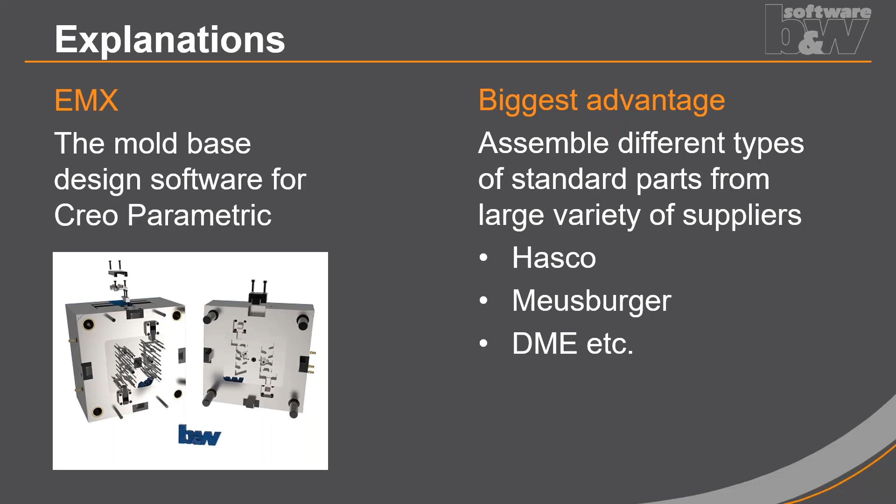What kind of parts can be assembled with EMX? Of course, for Moldbase design, you need the Moldbase plates. And there are other types available like screws, standard screws, shoulder screws, but also for the ejection of the mold part, you need ejector pins, you need guide components, or even cooling components for the cooling circuits.

It's great that you have these standard parts available, but on the other side, it's also necessary that you can create standardized cutouts within the interfered plates or other components. On the right-hand side, you see this guide component, and this guide component interferes with 3 Moldbase plates. And of course, you need different bores inside these plates to assemble the guide component. And that is also a big advantage of EMX, that you can automatically create these standardized cutouts for any type of standard part components.

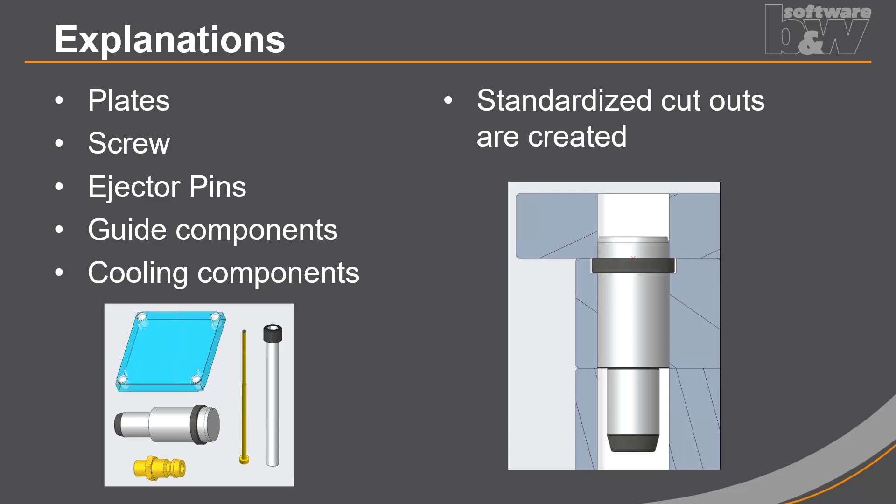Okay, so what has changed in our latest EMX version to make it ready for color coding? So far, we only created the cutouts, so only the geometry of the cutouts. And what we now introduced is a new parameter, which is called EMX_surface_function. And this parameter can have different standardized values. This parameter is added to each surface inside a cutout, and every surface will have a standardized value which describes the function of this surface.

So yeah, this is a little theoretical. So let me just explain this in a tiny example that everyone will understand. I have prepared a tiny example with a screw. So even if you're not a mold maker, you will understand this example. Here you see two plates that are fixtured with a standard screw, and the screw also has created several cutouts inside these plates.

And here you see highlighted in green color the surface of the counterbore. And on the right side, there is also the standard parameter dialog visible. And I have selected here the surface. And at this surface, you will find this newly introduced parameter called EMX surface function. And the value of this parameter is cylinder_counterbore. It's in German, but I think you will know this dialog quite well.

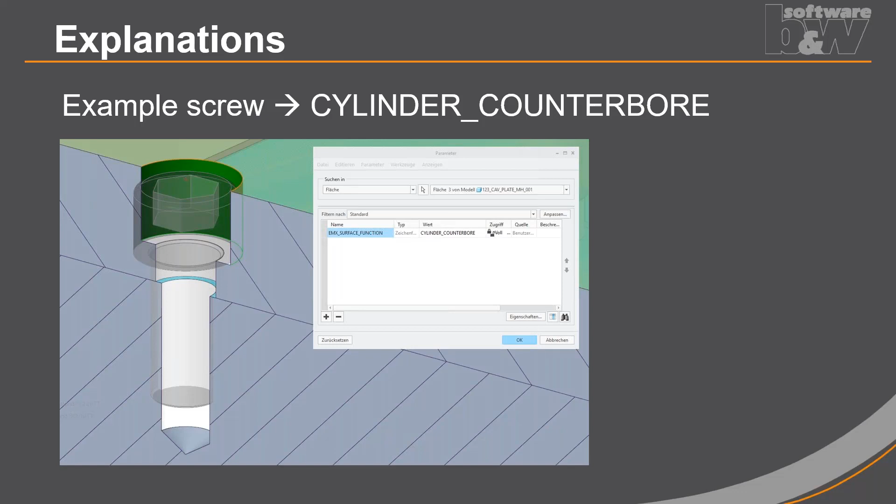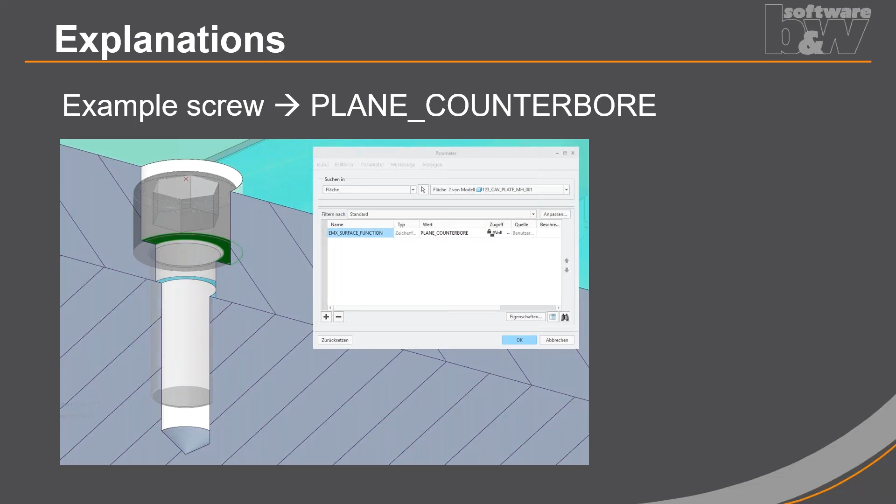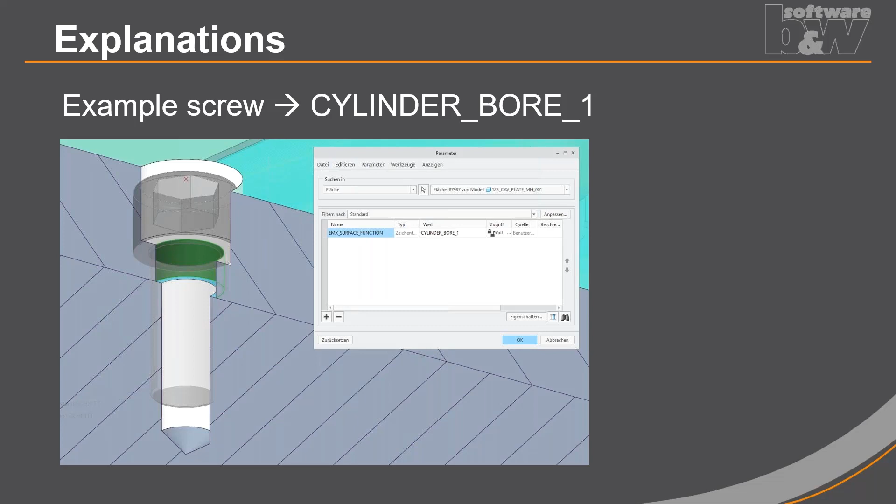I will switch to the second surface here, highlighted in the green color. And here we have another value for this surface function, and it's called plane counterbore. So it's the bottom surface of the counterbore. The third surface that we have in this example is the through hole of this screw. And this value here is called cylinder_bore_1. So this just tells EMX that this is just a through hole, not a specific functionality.

Okay, and the last surface that we have is the core hole of the thread. So this value here is cylinder thread core hole.

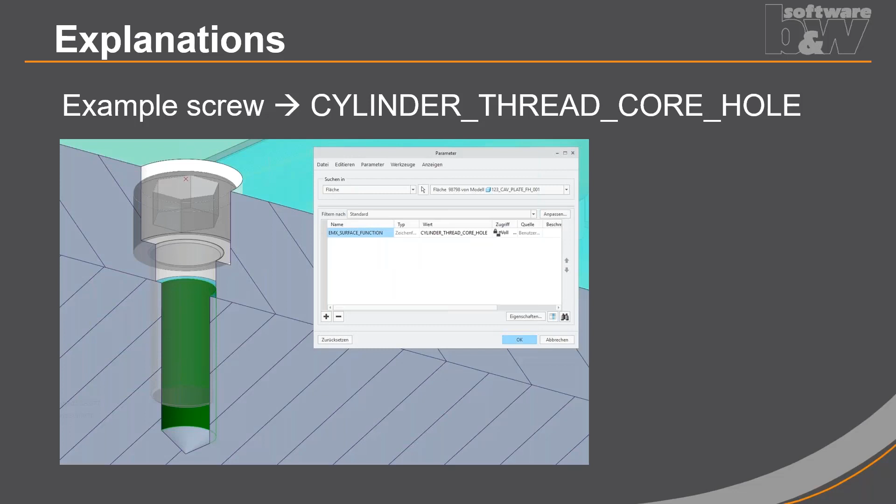Okay, so this was just the example for a screw, but of course there are many other functions of surface that can come up in several cutouts that are created with EMX. And if you are interested in these surface functions, we have created a blog post on our homepage. And this blog post explains all the different values that we just introduced to make it ready for SMARTColor.

I will just switch to this blog post. You can find it here. It's called designated surface function for cutouts. The link is also included in the presentation, so you will find this blog post quite easily when we send you the presentation. And here is a tiny explanation in the beginning, and then you will have just images with the usual EMX cutouts that are created, and with some colors and with the designated values, you can just see what values the surfaces have.

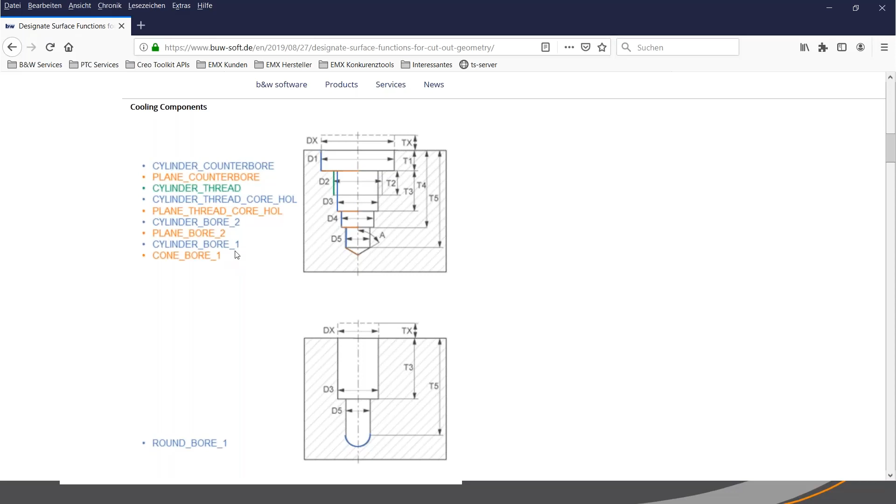Okay, so you have this here for cooling components, for O-rings, and all other components that can show up. So here we have ejector pins, and on the bottom you will also find the values for guide components and so on. Okay. So let's go back to my presentation.

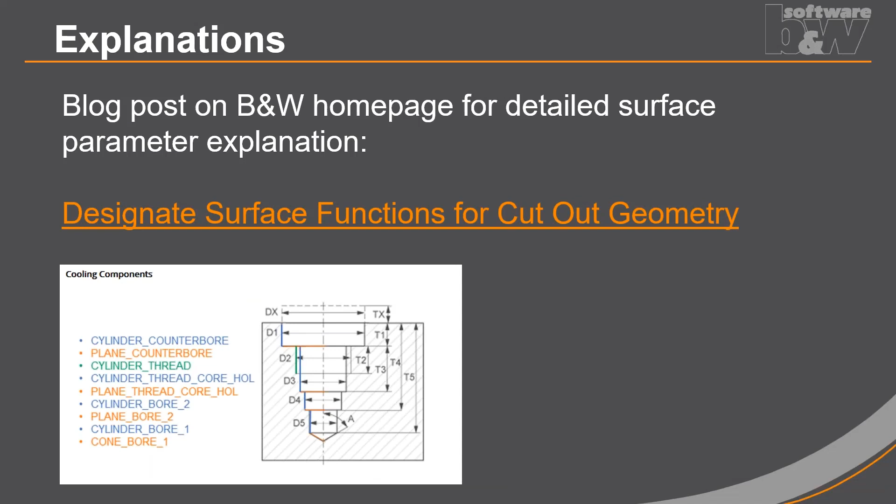And now the second question that arises is, how can we now convert these parameter values into colors? And as the topic of this webinar already explains, we will use SMARTColor here. So SMARTColor is our tool to designate values to surfaces, and to make this possible, we just introduced a special or customized SMARTColor configuration for EMX. And you can download this configuration from our website if you are interested in this configuration, if you want to test it.

And what do we do? We now assign RGB colors based on the parameter values that we just created during the design of the Moldbase. And we used the color coding rules of the VDWF. So this is a quite known association of German mold makers. So these guys sat together and they came up with a standardized color coding rule set. And we just decided that this makes sense as an example because it's a standard which is not just for one company. It's for mostly mold makers, but maybe it's also relevant in other parts of the world as well.

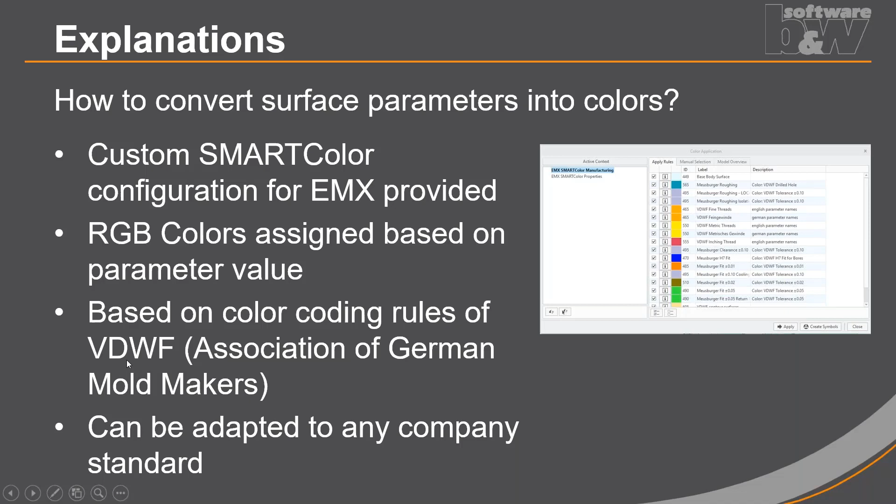Okay, so if you apply now the colors with SMARTColor, here for our screw example, you see that there are two different colors assigned in this example. And this green color basically says this is a Meusburger roughing standard. So this means this VDWF standard is also used by the Austrian supplier Meusburger. So if you send out the colorized parts to Meusburger, they will ship you the part machined based on these standards.

Okay, so green color means Meusburger roughing, so it's a VDWF drilled hole. And the second color, the yellow color, means that it's a metric thread, so it's a standardized thread based on the diameter of the core hole. So that's what it says. Okay.

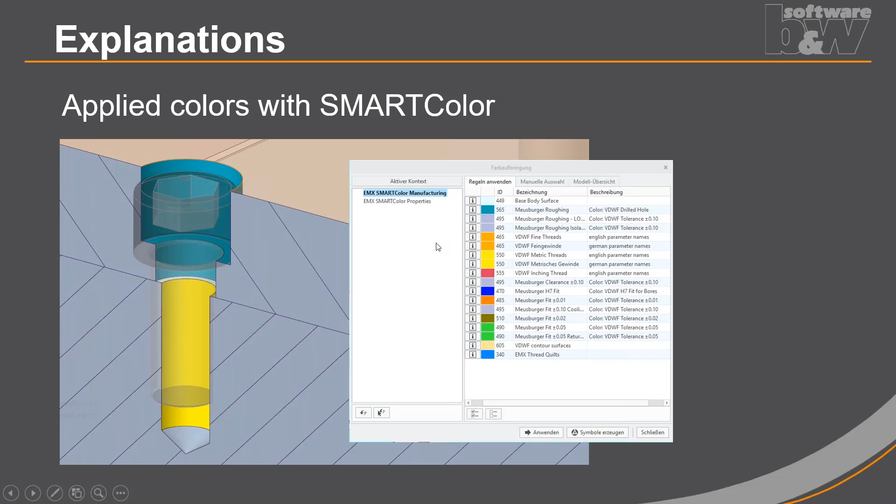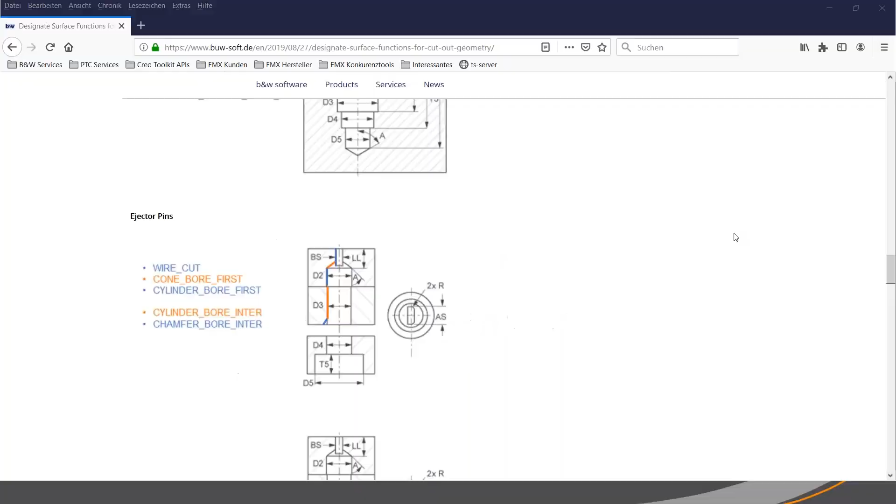Okay, so then I will just start with my Creo live demonstration. So I have basically 2 points that I would like to show. I would like to show you how you can apply color coding rules based on a configuration. And the second point will be, in case surfaces are not covered by this color coding rule set, you can also apply colors manually to finish the part. Okay, so then I will just switch to Creo Parametric. No, this was not Creo Parametric. Okay, so here we are.

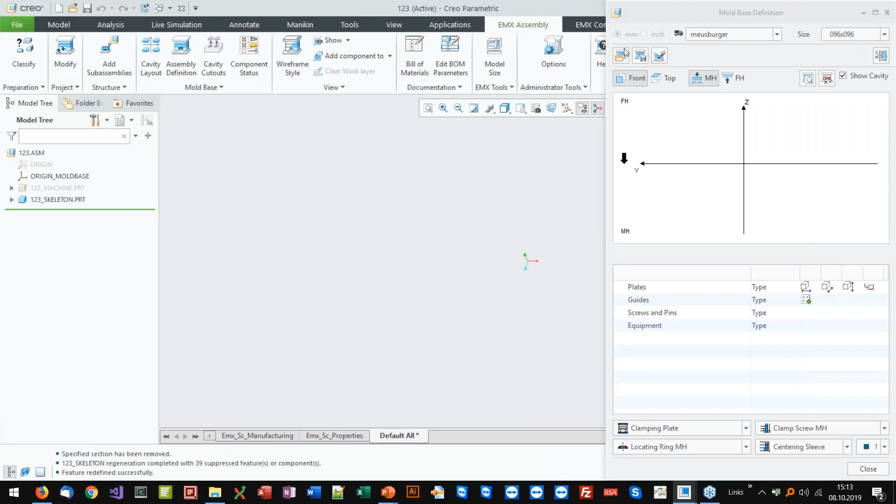Okay, so I will create a new project to show you how this works if you really start a project from scratch. So I will switch to the EMX tab and say create new project. And basically it's not important what the project name is, so we just use the default values. And now we have an empty new Moldbase assembly. And to speed up the assembly definition process, I will just use here this recipe type 1 from Meusburger, which basically contains a Moldbase stack with a couple of plates and a couple of guide components and clamping screws.

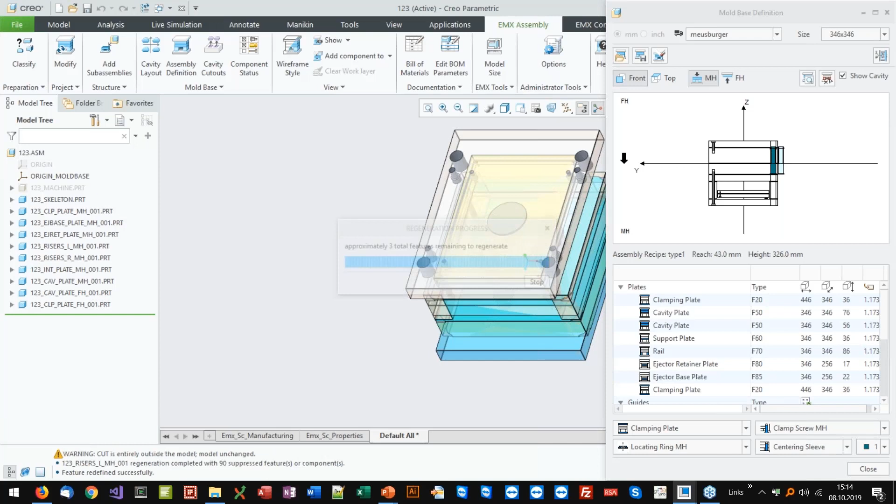So all plates are assembled, the dimensions are set to the correct values, and just some default colors for the plates are set up. And now we are done. Okay, so this is my default empty mold base with just a couple of plates.

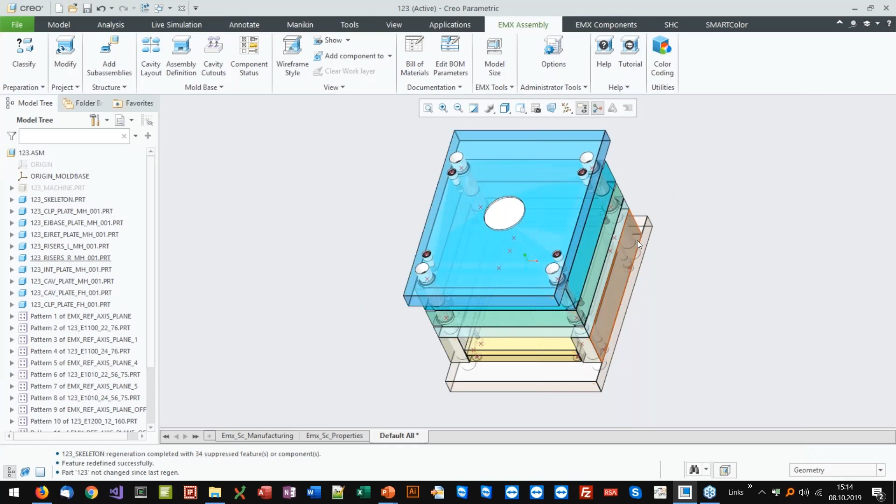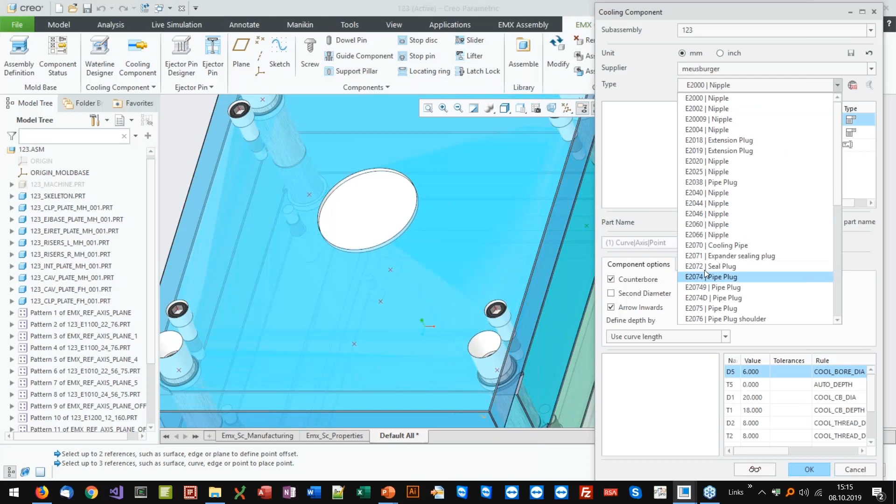And to explain how these rules work, I will assemble a cooling component because it's quite easy to explain the rules with this example. So let me just create a new point. And then choose EMX component, cooling components. And now I will select the E2072 seal plug. I have to select another size with the diameter 12, and I'll select my references, point

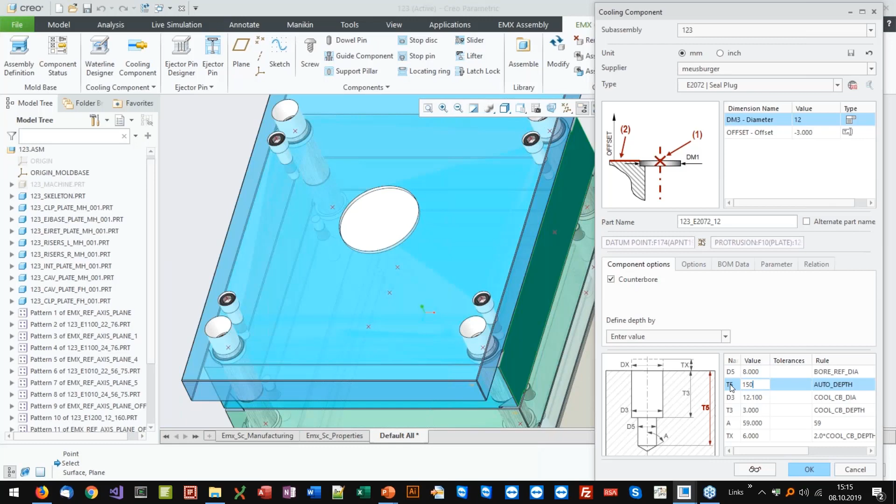and surface. Now we have to tell EMX how deep the drilled hole should be. And then we can assemble the component. Okay, quite fast. Okay, so now here we have the seal plug. We created a hole, and now we'll have a look at this component. So I will open the plate.

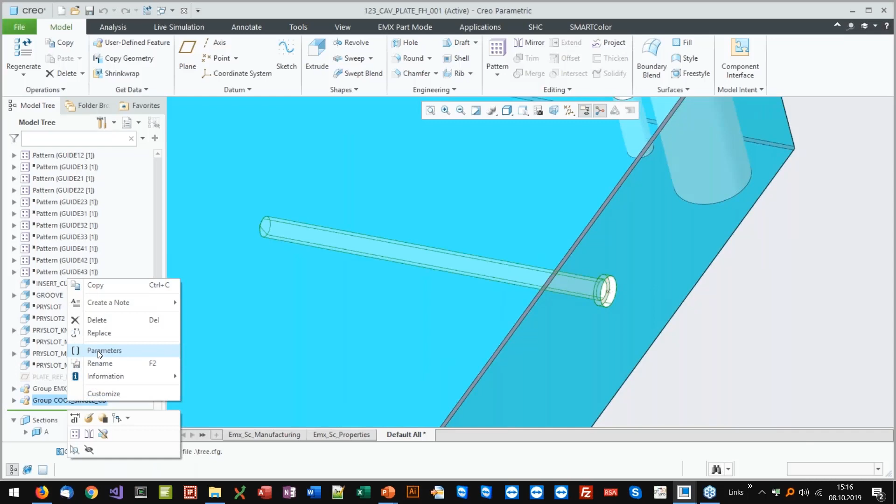The plate already has a couple of features predefined, so the guide holes, and here we see in the model tree a UDF was created called cool single counterbore, and this is related to my Meusburger component. So if I have a look at the parameters which are written to this UDF group, you will find several values which tell me the source of this cutout. So here this BUW component value is E2072, the supplier Meusburger, and the type is cooling.

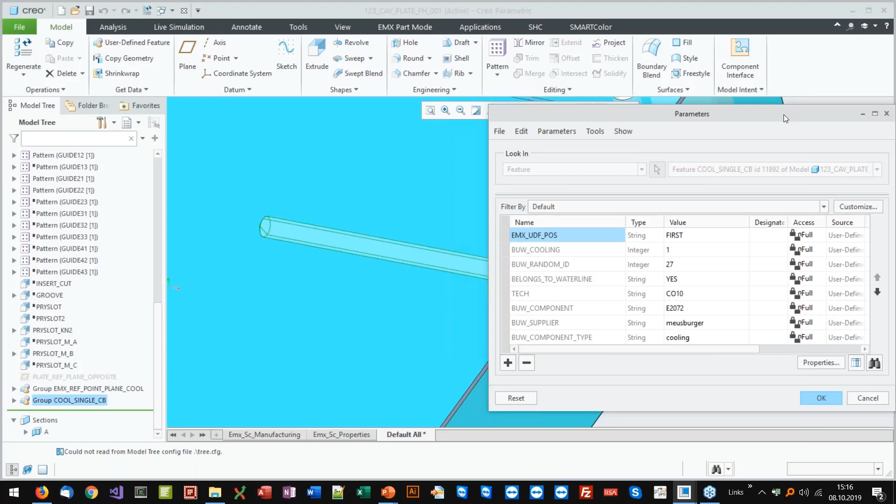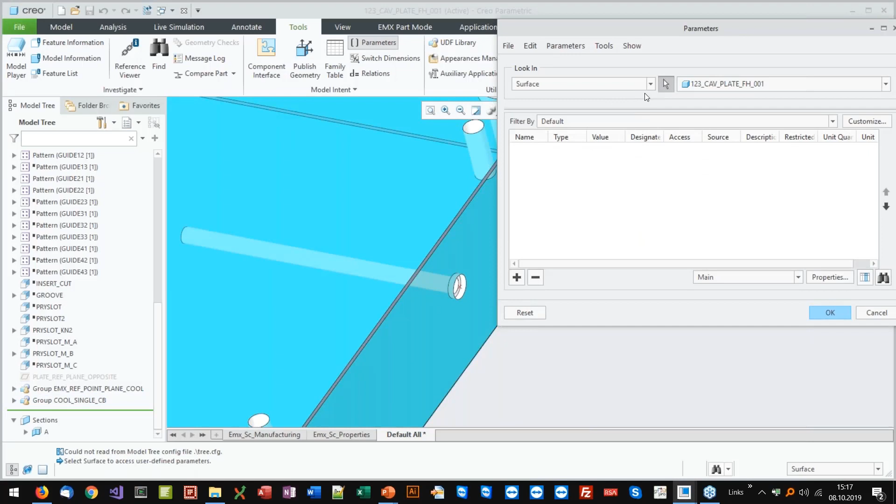Okay, so this will be relevant for our rules later on when I explain this a little bit more in detail. If I go to the parameters dialog, move this a little bit to the side, I can now choose here from surface. So I can select a surface and see what parameters are assigned to this surface. If I choose this counterbore surface here, I have to rename it, otherwise I cannot see the parameters. I see now the parameter EMX surface function, and the value is cylinder counterbore.

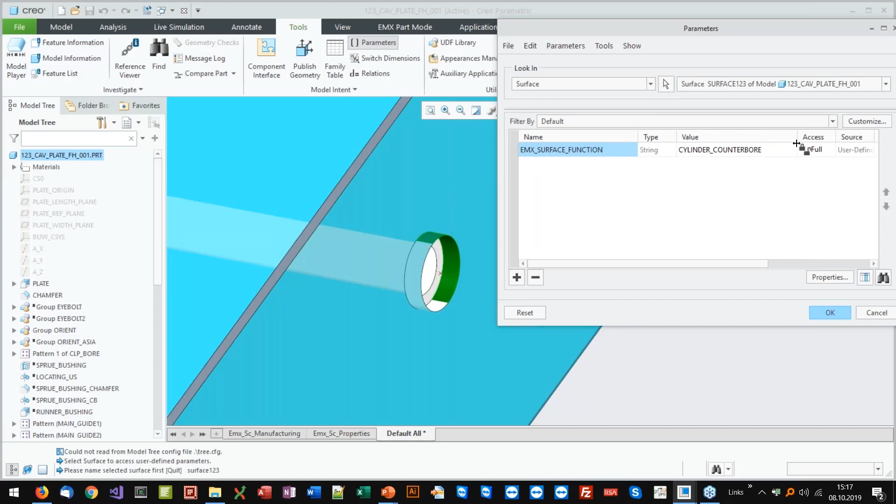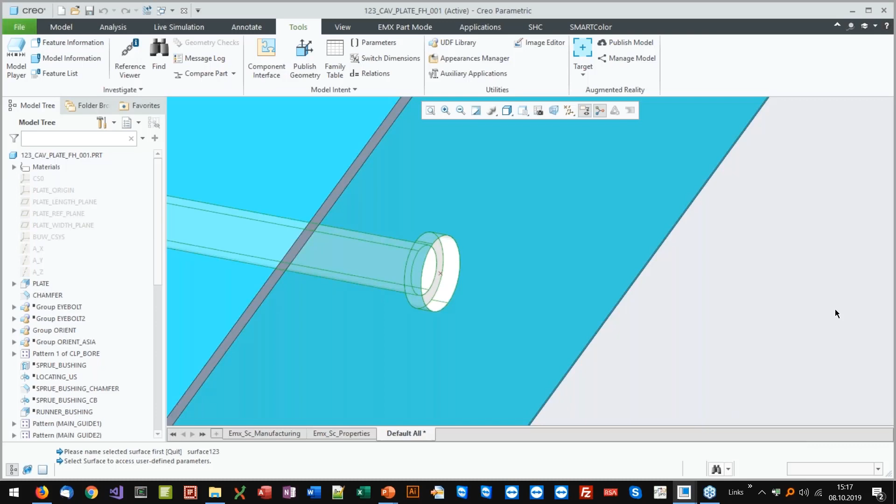So this is how this works. If I choose the surface here in the middle, it's called cylinder bore 1. So these are the values that are necessary to describe the functions of this cooling bore. Okay, so now we have two aspects. One is the surface parameters, and the others are the parameters at the group.

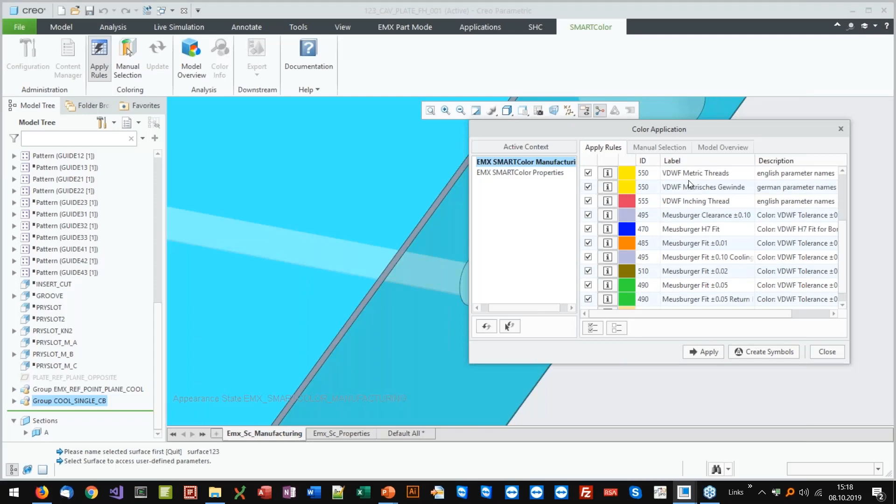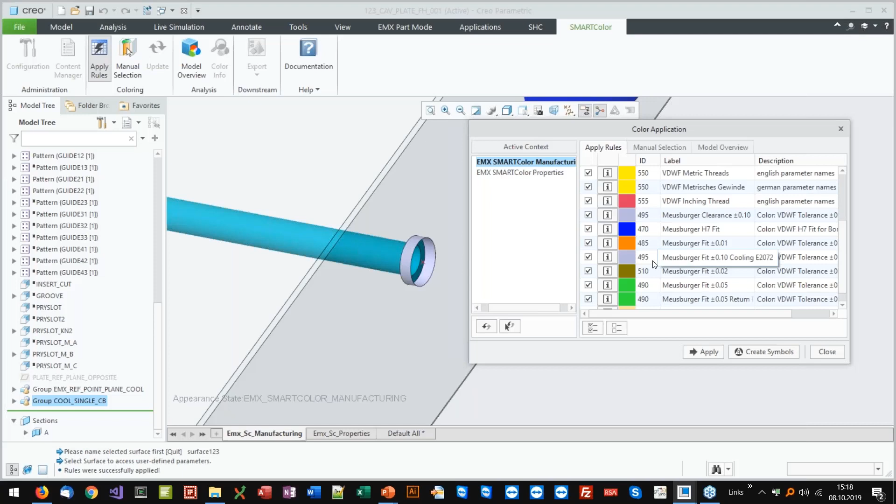I can now select apply. So the whole part is colorized, not only my hole, but also the already predefined guide components, for example. And we see now that there are two different types of colors assigned to my cooling bore. This purple is used to colorize the counterbore. So this means Meusburger tells us to use a different tolerance for the counterbore surface than for the plain bore surface. So this needs a different accuracy. Okay, so how does this work now?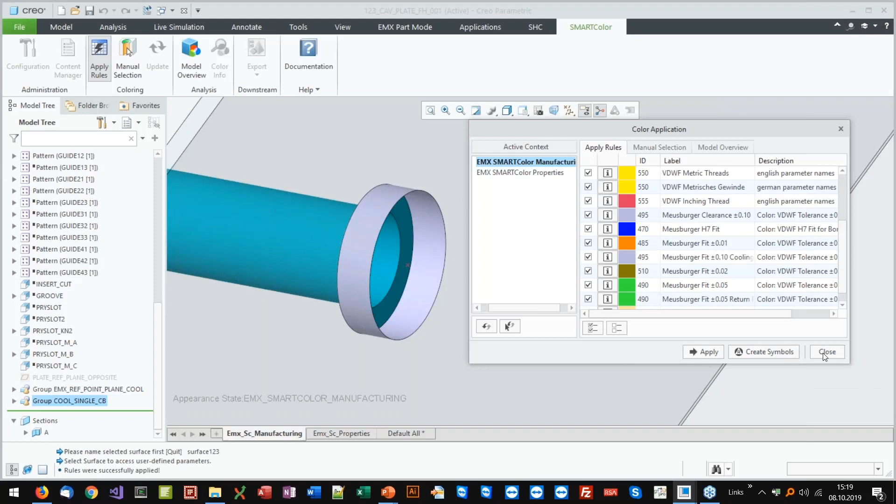If I go to the content manager, as an administrator, I can now work on my rules. So here we see these EMX SMARTColor manufacturing rules. And in the available contents, I can go to rules. I see here a whole bunch of different rules. And we will find this Meusburger roughing rule, for example. If I double click on it, here's my green color, the drilled hole. And the drilled hole rule is applied with different criteria.

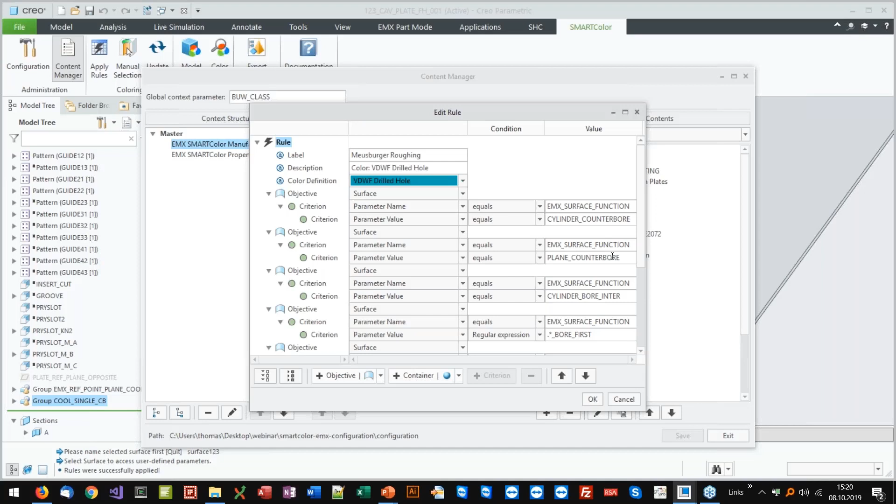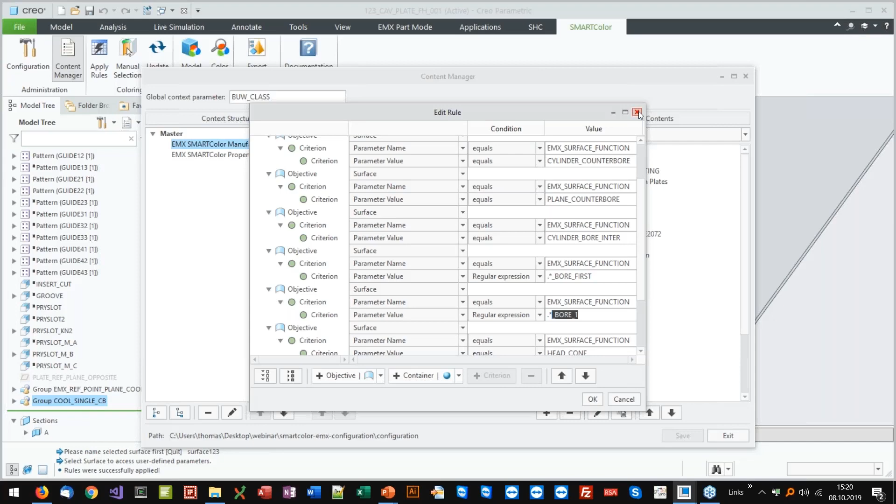For example, we have the criterion here: if the parameter name equals EMX surface function and the parameter value equals cylinder counterbore, please use the green color. Same here: if it's plane counterbore, please use the green color. And what else is important for my cooling bore? In case the end of the parameter value is bore_1, then please also use this green color. So in my example, I have my plane counterbore surface and the cooling bore hole, which apply to these green color rules.

So the question is now, why is there another color used for the cylinder counterbore in this case? It's possible to write even more detailed rules. For example, this one here, cooling E2072. This rule tells me: if the parameter name equals EMX surface function and the parameter value equals cylinder counterbore, and the container, my group cool single counterbore, has parameters like BUW component equals E2072, supplier equals Meusburger, component type is cooling, then please use a different color, which is this purple color, which

has a higher accuracy. So it's possible to create basic color rules, but also override these rules with even more detailed rules for certain components. This depends on your own rules within your companies, but also special rules like these for Meusburger.

Yeah, so this is possible. This gives you a good idea how these rules work in general. Our EMX configuration already contains a lot of different rules, and you can look at them and use them as a reference in case you want to apply other rules.

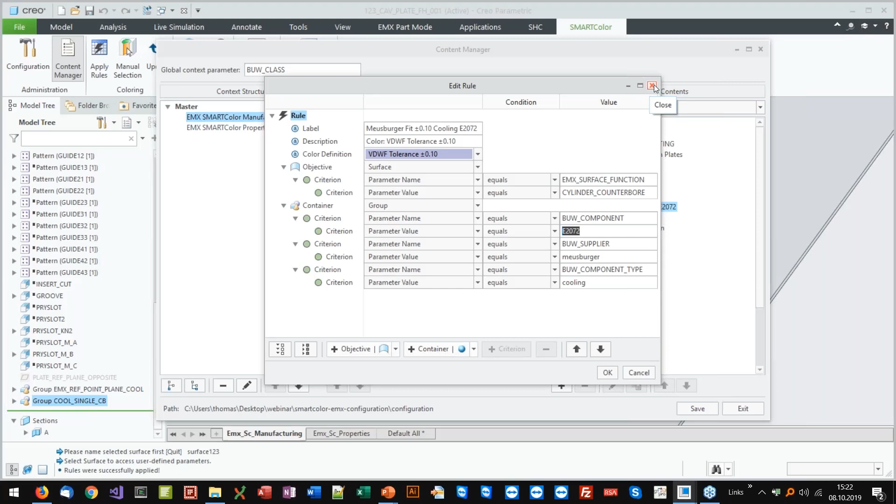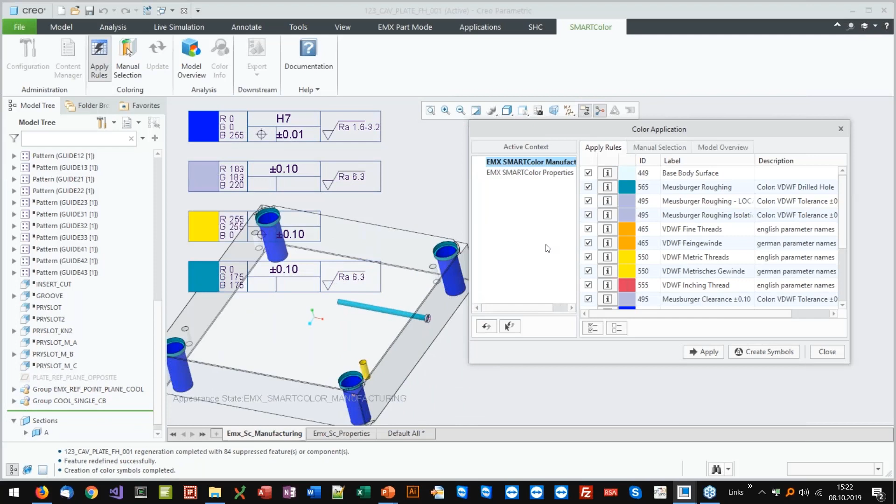Okay, so if I go back to my apply rules section, we also have the opportunity to create symbols. These are flat-to-screen symbols, which is quite nice because then, on the side of your part, you see what these colors mean - the RGB value, but also whether it's a fit, or what the position tolerances or surface quality values are for these colors.

And you can use the combined states at the bottom of the graphic window, and also switch back to the default. This is quite nice because if you do this all manually and colorize your default, you cannot switch back and forth - you just have the colors, and it can be hard to understand what the different colors mean. So here it's quite easy to switch between the different states.

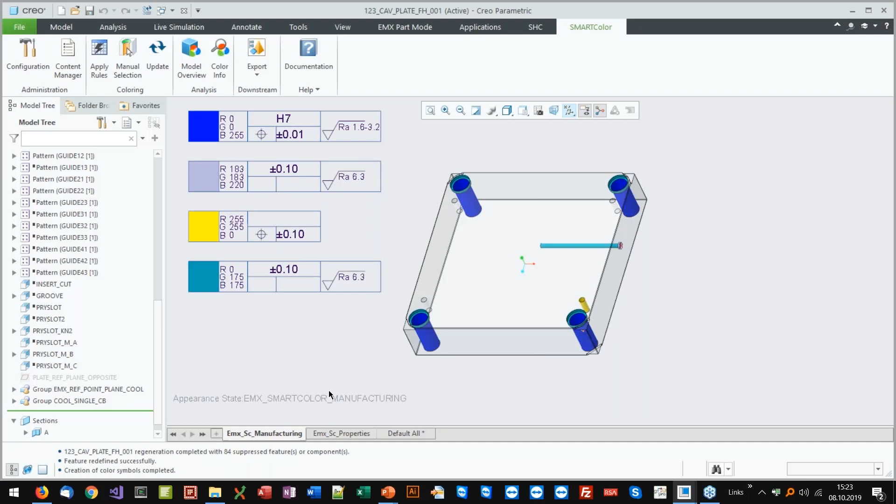Beside this manufacturing context, we've added another context which can be quite helpful, called SMARTColor properties. This context will colorize the part in a different way - depending on the type that created the cutout, it will colorize the cutouts differently. So everything created by a guide component will have a purple color, ejectors will have this shabby yellow or whatever it is, right?

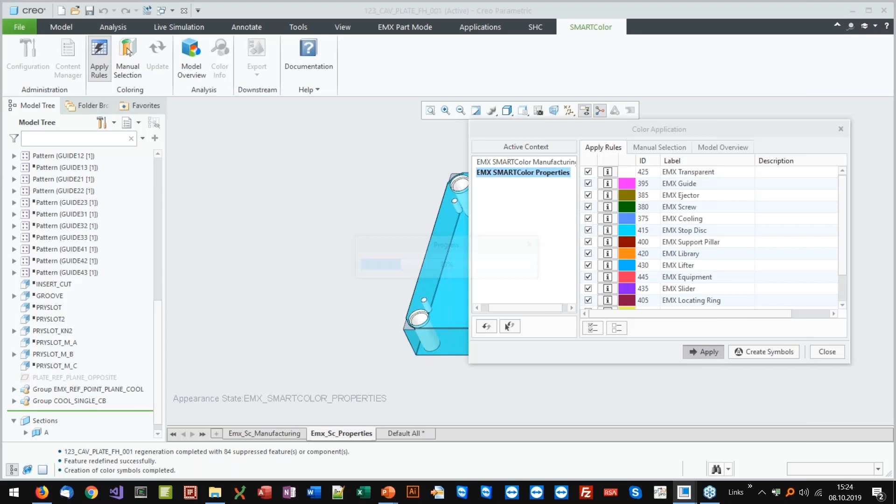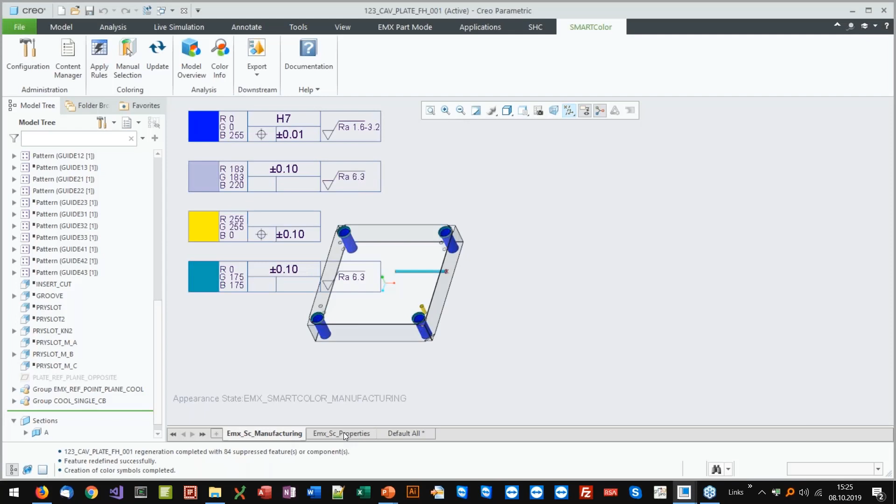So if I apply these colors, you will see now that there are 3 different component types already created - coolings, screws, and guides. So this is what can be found here. You can switch between these states and go back to the default state. So this is what can be done now.

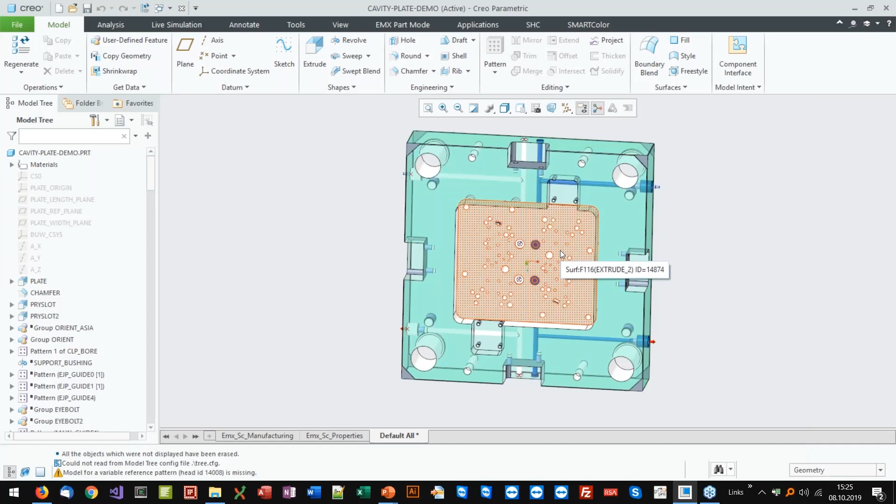To show you a little more detailed component in a second step, which is not just a demo part, I will close my current components and clean up my memory. I've prepared another part - it's still a demo part, but it's basically part of the cavity plate, which is part of our current EMX 12 tutorial. You see here, if you open the part, that this plate is already a bit more complex.

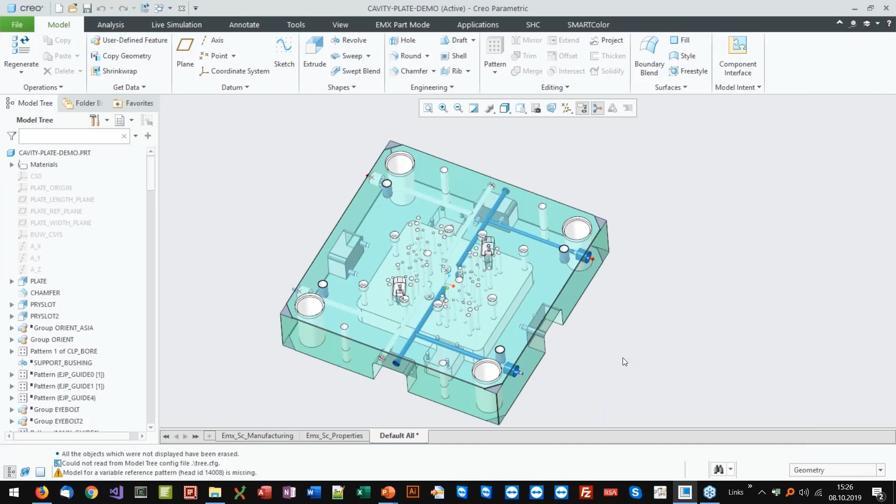Okay, so you see there are ejector pin holes, different screw holes, 2 cooling channels, and so on. But the great thing now is that you don't have to go from part to part and colorize everything by yourself. You can just go to SMARTColor, go to Apply Rules, say Manufacturing Context, Apply - and it takes a little longer because there are more features inside the plate.

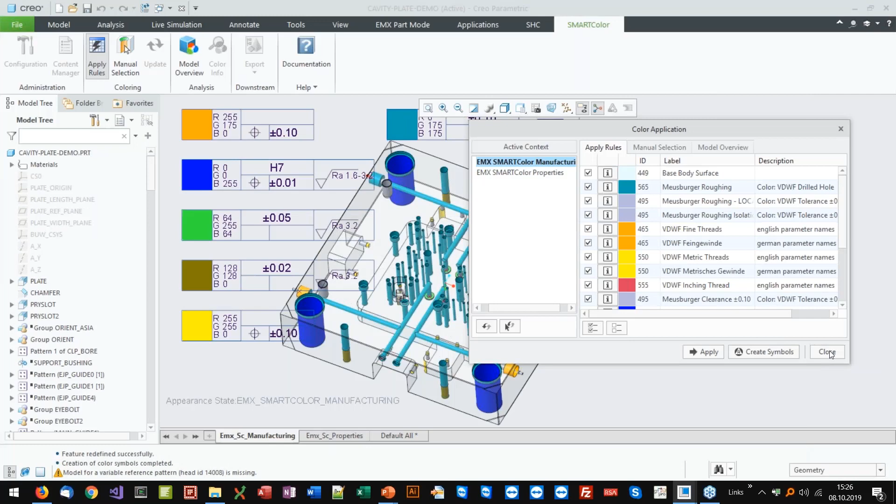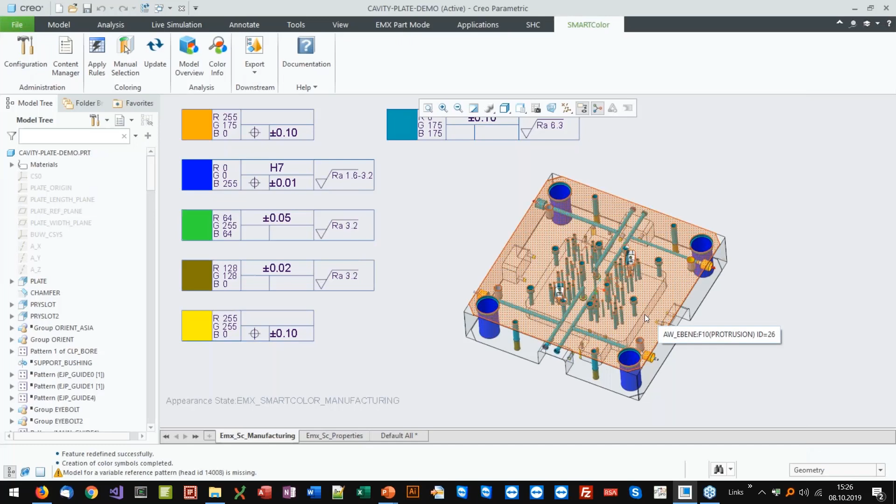Create symbols, and close. Okay, so now my screen is a little small, so it switches over with the annotations. But the great thing now is that all components created by EMX are fully colorized, and this can be done with all parts created within this project - this saves a lot of time compared to doing this all manually.

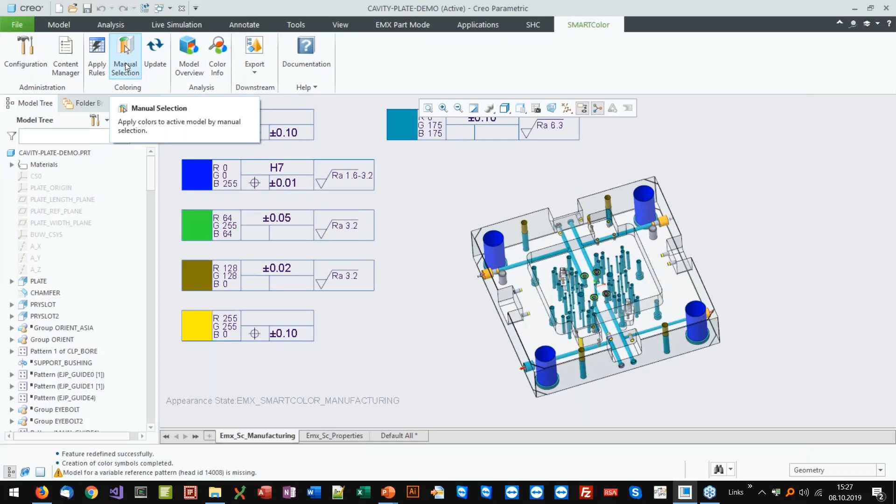Now you see here that obviously not all surfaces are already colorized - for example, the pockets here for the insert parts are still transparent. Now you can use the manual selection of SMARTColor to choose from the same color palettes or color categories. We've integrated a couple of handy tools here where you can select or colorize surfaces quite easily - this is way better compared to the standard colorization mechanisms that come with Creo.

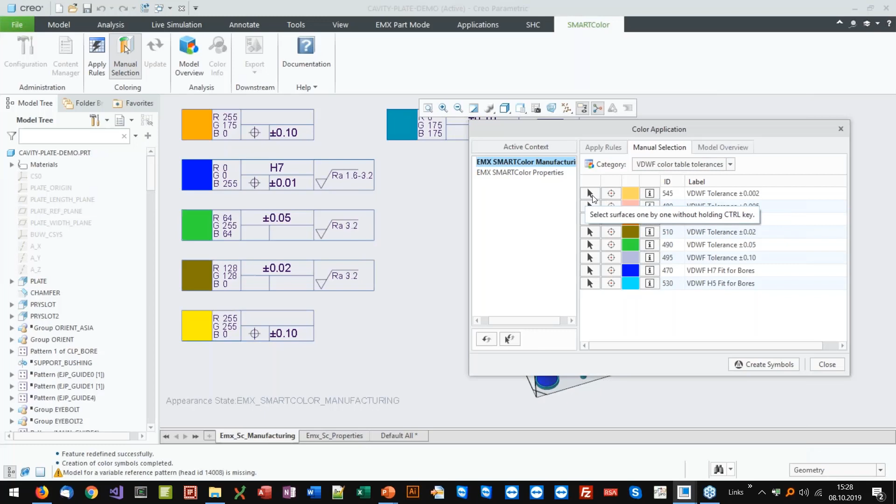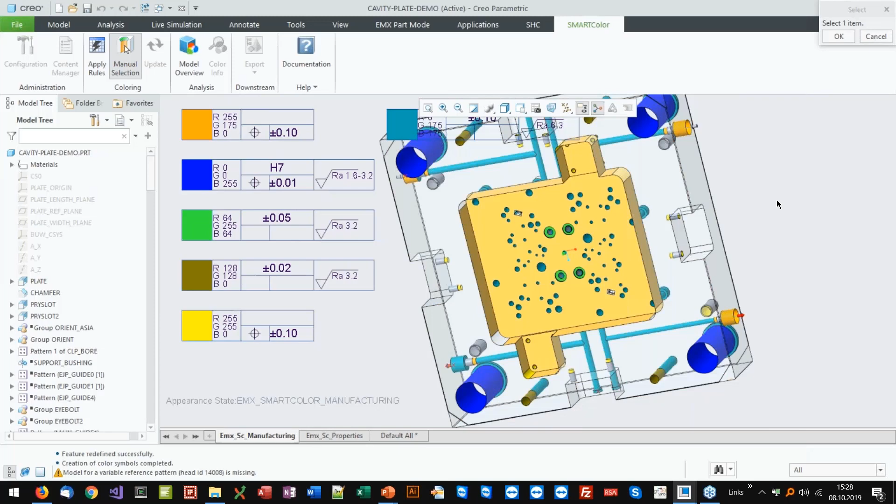Okay, so I will choose now, for example, the VDWF tolerance plus minus 0.002 millimeters. I can say select surfaces, and then just jump from surface to surface and colorize them. And they now have the same information content as if they were created with the rule set.

Okay, same here for all rounds. They need a different color. So this depends on what tolerances you want.

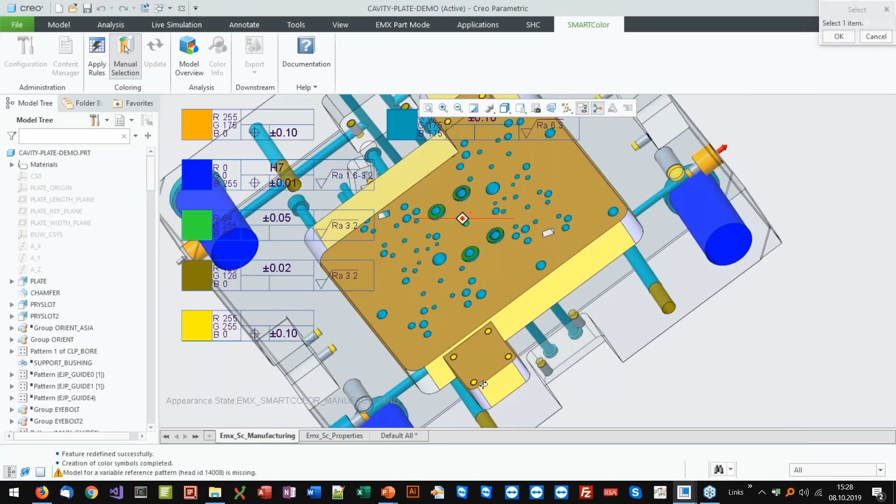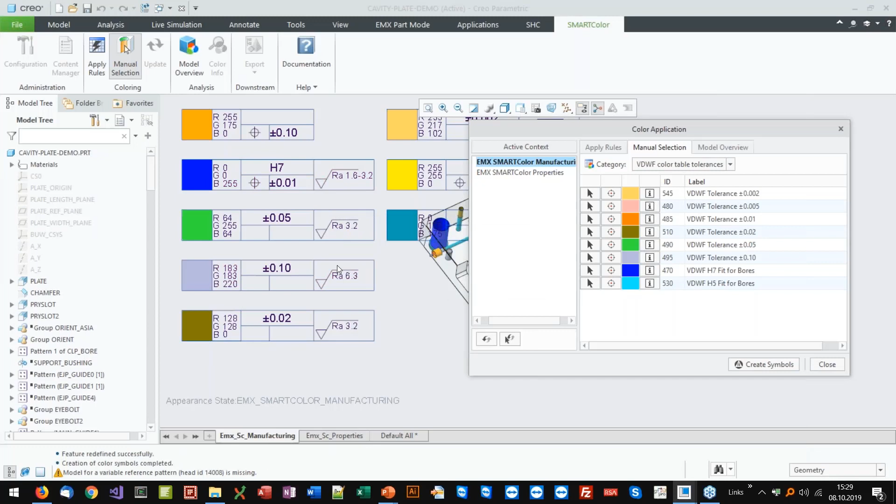So now, as the designer, you might even know this better than me as a developer. So, okay, I can update my symbols and say create symbols. And you see here that the symbols are adapted, so all missing tolerances are added to this overview. And then you see here different tolerances, and you can go on and finish the whole plate.

And of course, you can also enhance your rules so that other surfaces not covered at the moment will also automatically be colorized. But from our experience, it's mostly impossible to automate everything. In the end, if you have automated 80% and you only have to do 20% manually, with a very nice and handy tool integrated in one software, it's more fun to do these kinds of tasks.

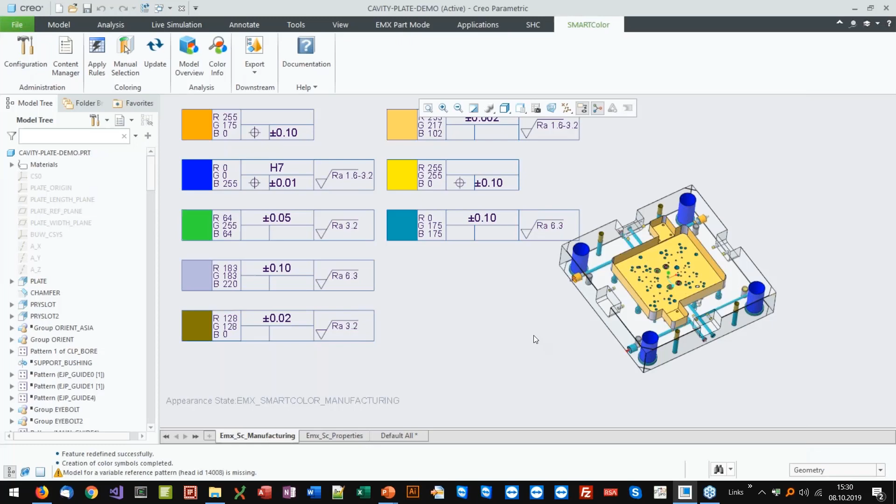Okay, good. So this was my live demonstration, and I will just switch back to my presentation. Yeah, as a summary...

It can be said that this parameter, the EMX surface function, is very nice because it's independent from fixed color values. So in case you have colorized UDFs which have a fixed color for each surface, it's a lot of effort to just recolor all these UDFs. With the surface function parameter, this is completely independent from fixed colors.

So changes, in case your color coding rules might change for some reason, can easily be modified in SMARTColor. If you update the rules with SMARTColor, all changes will also be applied to the parts. So it's not a big effort to customize EMX on this.

And it's also quite nice that you can implement different company standards with different colors quite easily in SMARTColor, which was not possible in EMX before.